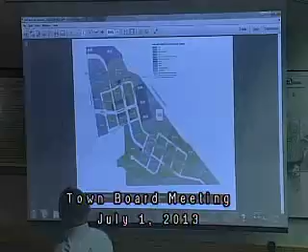You recognize the property, hopefully, but the dimensions have been elongated somehow in the transfer. The core area hasn't changed very much at all, and again, the focus on this plan was to revise the south area plan. There were a couple of comments that required a revision and to get specific feedback. The first guidance was to really make sure that the Coal Creek connection was a strong connection, not just an easement that the road might or might not go somewhere.

And when that road was identified as a priority road and a priority connection that was very, very likely, as I discussed at the last hearing, were that the case, we would change the grading and bring this road into the southern village green. And there's a couple of components there.

There's the bike path and trail component, and then there's the pedestrian promenade, and of course the third, and I probably put them in reverse order, is traffic, the traffic that comes into the town square.

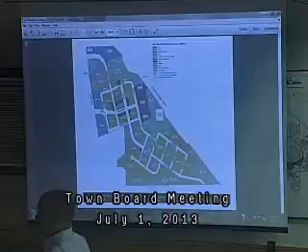So that we have that. Then we previously identified we were suggesting a feature on the edge of the village green, this pre-K site, the 2-acre site for BVSD. And here we've accomplished virtually the same thing. We really like the connectivity to the village green.

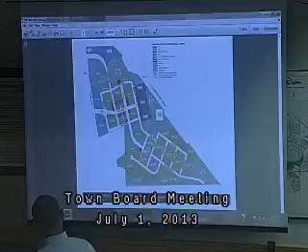And then we have all the other features we've discussed with the orientation, the pedestrian orientation of all the housing or live-work or whatever. All the structures built along Avenue B will recognize Avenue B as a strong pedestrian promenade and have that strong orientation, including balconies and accessibility. Sort of as if you were walking down Main Street in Louisville, you see the buildings, some of them old houses that were turned into stores and restaurants and things like that. So that's sort of how we envision that.

Randy, can I ask you a question? So if you do that layout, then you're not going to have any exit point through by Discovery Park, correct? Discovery Park, well, the office building up here.

Right here we would have a trail connection, so from here to here is 40 feet in height, in elevation. So we would have a trail connection to that existing dead-end road there. There could be an emergency access, for any time other than when there's ice on the road, it would work fine.

So part of what we've done, as I was mentioning, is in the previous plan we had a 4.5% grade going up there. We had 5% grade coming up Avenue B, so that was quite a steep grade. As I discussed before, but just to touch on it now that we have an exhibit to show, when this Avenue B was coming up at 5%, everything was impacted because we were trying to make this connection that's way up in the air.

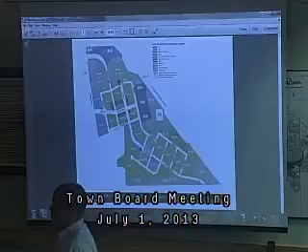And so now we have brought this down to a 3% grade, which is quite a bit lower. My goal when we get into final design would be to get us to a 2.5% grade if we can. That's really, really strong for pedestrian feel. San Leo Hills is 4%, and your staff has walked through San Leo Hills. In my lessons learned, I think that's a little too much.

It pushes the entries back, and it's a little bit of work pushing strollers up. Do it once, it's fine, but if you do it every day, it's suboptimal, and we want people to walk this every day. So our goal is to get that down to 2.5% grade, half the grade that it was at 5%. And we can achieve that by disconnecting these two roads.

So Randy, you're bringing Coal Creek up basically through the center and then connecting it with the pedestrian area. If we anticipate that Coal Creek being a feeder from Rock Creek is going to have more traffic rather than less, bringing the people who live in Rock Creek will use it to come up. Is there any merit to actually having it connect with Avenue C and coming around? Because you're going to have a commercial entity there on Avenue C, and another commercial entity further north on Avenue C, so keeping that heavier traffic out of the residential areas.

So our evaluation of that is traffic is a challenge, but it's also an opportunity when you're trying to create a vibrant commercial hub. Because we do expect traffic here, our traffic consultant has evaluated this plan and rerun calculations and told us that the main thing we have to do is give up on the idea that one day, under some odd set of circumstances, there might be 1,900 residential units. So if we take our application down to 1,400 units, which is the maximum we really think is reasonable given the office and retail, and now that we have the agreement with BVI and Cornerstone, that reduces the conceptual potential peak traffic.

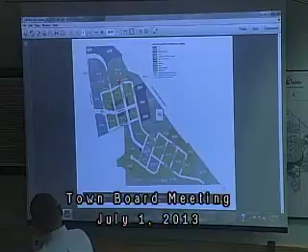So even though we have the wide street, we don't have on-street parking protecting the pedestrians. We have a wide pathway, 12-foot pathway, and we might have to introduce the loathed speed bump or something like that. The segment from here to here, I'm most concerned about the speed because there's no conflict.

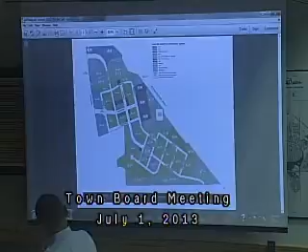Hopefully there's enough bike riders that will slow the cars down. When you hit the Village Green there, and you've got the 2 skinny roads on either side, are those one way? Yes. The traffic coming north on Coal Creek will always go to the right, and the traffic coming south will always go to the left. That's right, sort of if you were going west on Pearl Street. Right, and as right when you hit it.

So this may be a question more for staff, but the long-term vision of Coal Creek as it goes south out of the town center would be that there would be traffic mitigation through that area. It's a very wide street, we restriped it so it wasn't 2 lanes in both directions, so that was helpful, but I think there's been discussion that there would be hardscape changes there that would help mitigate traffic as well.

Staff's vision for the existing South Coal Creek Drive is to put a permanent landscape median in there and make it with separated drive aisles. And the timing of that would correspond to what was happening in the town center? We do those at the same time, we made a connection.

Okay, thanks. And then addressing another planning challenge that was addressed, and making sure that previously we had a narrower strip of office, and the concern was expressed that because of that narrow strip, the buildings might be intended to be aligned parallel to the 36, and there was guidance not to allow those office buildings to be a shield or a barrier visually. We want to provide peeks into the community to let people know there's something interesting going on here, so they come over here.

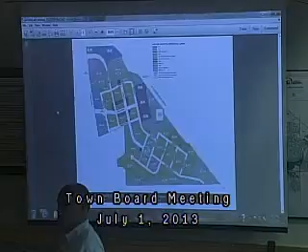I see Alex in the room, right? Is he still here? There, Alex. Can anybody provide me a corollary street that exists in the town of Superior or Louisville that would resemble the width of Coal Creek Drive as planned here, with the same level of on-street parking? I've got to go drive it, and I've got to see what I think about it.

Yeah, he's got some visuals. Great, but do you have something I can actually drive on? He does, he has real-life examples for you. Okay, good.

Well, while he's looking that up, what was the long-term plan for Discovery Drive? I mean, wasn't it intended to go all the way through at some point? And how did we deal with that grade in those long-term plans?

Well, it was always envisioned to connect, but the details for that connection were never looked at in that sort of detail. Not until the development comes forward would we look at it at that level of detail.

I don't know if this was where Chris was going, but I actually find losing that connection to McCaslin too bad, actually. Yeah, that's exactly where I was going. I like the idea of having that second exit there. I couldn't imagine residents wanting to take the back way through Coal Creek to come around McCaslin and get on the highway, but if everybody has to go through the town center and go on those sharp curves with stop signs, when people are going to work in the morning, is that going to create backup traffic in the town center? I guess that's maybe a question for Alex to address.

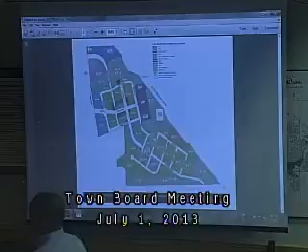This area here, there's a couple hundred homes within a 15-minute walk of downtown. So that 15-minute walk, it's a national statistic. I think in Boulder, my guess is it's at a 20-minute walk, 25-minute walk, people would still walk more.

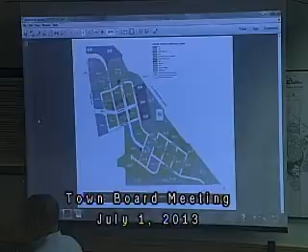Okay, so I do agree that there'll be a lot of walkers. There'll also be, for every person that walks, there's 5 that'll drive. Even from within the residential right here, they will get in their car and drive to here. Yes. Okay.

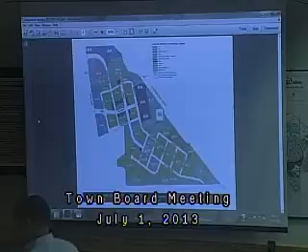They're going to shop big. They're going to shop really big. That interaction and that dynamic changes.

When you fill up your on-street parking, and then people know, you want to fill up the on-street parking, but at the same time you're filling up the on-street parking, there's more going on there, and then people will go out of their way and they'll walk farther.

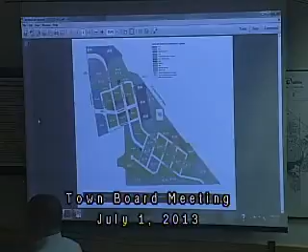When times of day when there's not a lot of activity, or when the on-street parking is convenient and right in front, people will drive there. They'll be more inclined to drive there. And then once people know that it's active and there's things going on, they'll be more inclined to walk.

And that helps the business not just be successful Friday and Saturday night, but 7 days a week. Okay.

Trustee Williams? Okay, I have a lot of new toys here, so I'm not quite used to operating them. So,

What I wanted to know here is the extension to Coal Creek Drive you've done. This is new. And how about, have you considered Campus Drive to Avista Hospital, as far as bringing those folks to Avista Hospital and vice versa, Louisville, Avista, so that your town center here, or our town center here, is more activated,

in what, Mayor, you're looking for? I want you to answer, but Matt, do you have any updates about anything?

Yeah, so that was one of the comments we received from the city of Louisville, and we're hoping that on the July 8th meeting during the work session that we'll have something that we can put together for you to look at to try to get a good feel of what it might look like or feel like with the plan.

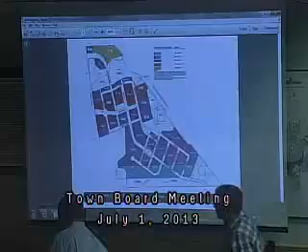Alex Ariniello, Director of Public Works and Utilities, responding to Trustee Pennington's concern about visuals and what these streets are going to look like, and some examples.

What I tried to do is, you're going to look at street sections as one of your sheets in the PD. I'm going to go over several of these, give you some visuals, and try to translate widths into pictures and feel.

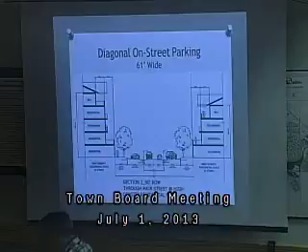Let me start with road design. A typical car is about 6 feet wide, a pickup or extended cab pickup maybe 7 feet wide, and a truck is about 8 feet wide. A typical lane on a freeway is 12 feet wide, so a car traveling down there has 3 feet on each side, and you design that for 65 miles an hour.

When you get into lower design speeds, like with McCaslin, we want to narrow the lane widths, going down to 11 feet at about 40 miles an hour. In an urban area, you can even go down to 10-foot lanes, because you're going slower and don't need as much room on the outside.

However, you have to think about trucks. Big tractor trailers are about 8 feet wide, so they have a little difficulty with 10-foot lanes, but if they move slow enough, they can do it. Your parking lane is usually about 7 feet wide. I wanted to give you those dimensions.

One of the sections discussed was having diagonal parking on both sides with 2 travel lanes, 10.5-foot lanes in this particular section. This is section 2, a 90-foot right-of-way with buildings coming up to the right-of-way line. So it's 90 feet between the buildings, with diagonal parking, and then a pedestrian strip of 12 to 14 feet that could be paved or have planters. That's kind of the diagonal design.

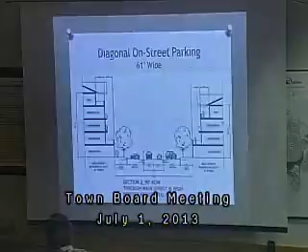And what are we proposing? 61 feet wide, compared to their 54. That's 61 from the curb, and 90 feet would be the right-of-way when you account for the sidewalk and parkway strip. So this is a little wide, and we've been discussing the width of the diagonal parking. Some have a pan here, so instead of water flowing to the curb and gutter on the outside, they're collecting drainage in this 2-foot pan between the diagonal parking and the travel lanes, which is why it got a little wider. I'll show you an example of that in a minute.

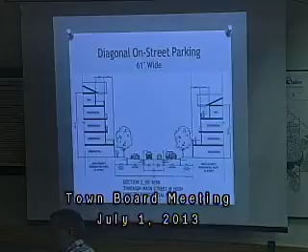And it feels dead and no one ever crosses. Right, and when do these get too wide? This is, I mean, this is too wide, almost. One feels it's too wide, you know. I would agree, I remember Carl thinks that's his talking point.

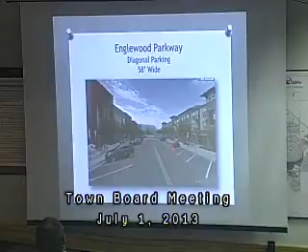This is one in Englewood, and here we have 58-foot wide diagonal parking with 3 or 4 story buildings.

Okay, so the next section I want to look at is the parallel parking on both sides, and this is section 4, one of the loop streets in the core area. We have parallel parking on each side, a 12-foot sidewalk, parkway strip, and parallel parking.

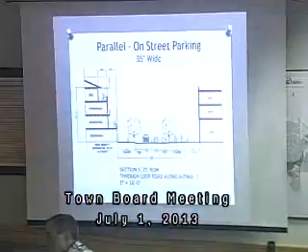And this is section 5, where you widen out in certain areas to allow a wider area for the building and for cafe parking, cafe seating, and so on. So go back to this - how wide is the driving? This is 35 feet wide, so you have 10.5-foot lanes and 7-foot parking lanes.

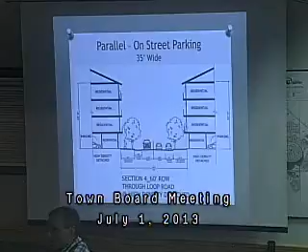And are we going to allow semi-traffic through Town Square? Is it going to be allowed up Coal Creek Drive? We'll have to allow delivery trucks since we have restaurants. So how do we intend to funnel delivery traffic? Is it going to go wherever it wishes to go? What we do is take our design vehicle, a big tractor trailer, and circulate it through the core area to make sure trucks can make the turns.

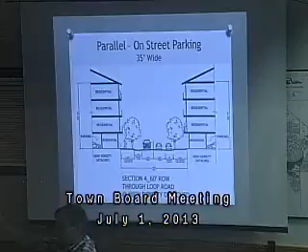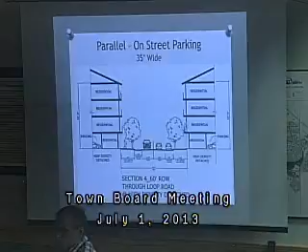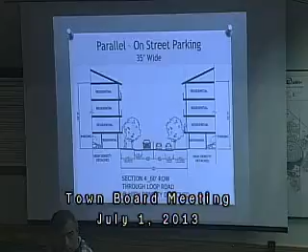We make sure in areas where they have difficult turns that they have ways to traverse the curb - we don't want them traversing the curb. We looked at all those areas to make sure they can make the turns. It's typical that when they make a turn, they take up the opposite travel lane in this type of urban environment. If you accommodate those types of trucks for pedestrians, you get wide intersections, wide streets, and it's not as pedestrian friendly. So there's a trade-off between a pedestrian friendly street and a street that has commercial traffic. We don't intend to have a lot of those types of trucks going through, but we can accommodate them.

Those are 12-foot roads then, right? Because you've got 7 and 7 is 14, 38, 24 - they're 12-foot lanes for this. These are probably 11-foot lanes and 7-foot parking stalls, so 22 plus 14 is 36, 38. Can we see any of those with cars coming at us? Yeah, I'll show you a few empty streets.

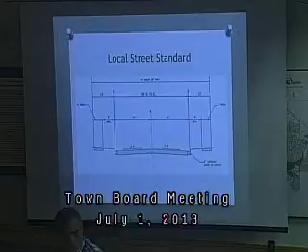Now, to me, 30 feet, again, that's Sagamore, and you've got to be careful how you design it. If it's a collector, we had that debate early on about whether Coal Creek was going to be a collector through the town center. If it was, we may want bike lanes. So we had that discussion. Initially it wasn't going through there, it wasn't going to be a collector, but now it looks like more of a collector.

Castle Peak is another problem street where you actually have a lot of parallel parking on both sides. You've got a lot of small children, a dense neighborhood, but nowhere as compacted as this is going to be. How wide gutter to gutter is Castle Peak? They're a little wider, 32 or 36 feet. Which one? We have some 32-foot streets, I think.

I'd be interested for future reference because to me, Sagamore does not work, and Castle Peak does not work, if we're designing something from scratch where we've learned lessons. A lot of those streets have very narrow walks, 4-foot walks that are sloped. You don't really want to ride your bike there, and it's not wide enough for two people to walk. So we're going to have separated detached walks in most of the area, so we'll have a better pedestrian environment.

And how wide are the sidewalks? Five feet wide. So I just wanted to give you a feel of the streets around the area, what they look like, and what their feel is as you go through the cross sections.

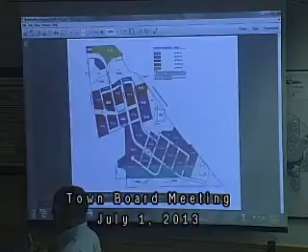You might have some neat feature in a building, like a parapet or a rooftop feature, whether it's a usable architectural feature or just an architectural feature in the concept of community art or village art, maybe a clock tower or some other feature. So what we're proposing is to focus just on building heights by these districts.

So this would be the 55, everything in purple, and then 65 feet would be the buildings in red, and in orange would just be the 75 feet. So there's just right on the town square.

We had talked about taking the town square down to 55 feet, but the thought is that we need a portion of the town square. We want to distinguish it as a town square, so for just a small piece of the town square right here, we would want that to go up to 65 feet for that small area.

65 or 75? I can't see the numbers up there, I apologize. So the orange is 75? Yeah, thank you. So as opposed to the approved PD, where everything was 75 feet and 5 stories, the only things that would be 75 feet in the town center are these 3 areas.

This over here is the Cornerstone Medical Office Building, and before this came up, we've had discussions, and they're working on bringing in other medical office users and putting together their magic formula of tenants. So we've contemplated that at 5 stories.

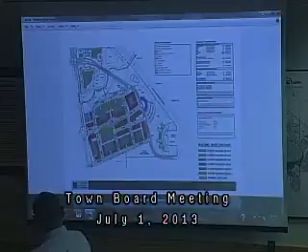And again, that would contrast to the approved PD, where the colors are the same, but everything in this orange color is 5 stories, and everything in the other orange color is 6 stories. So there were just these 3 buildings that were 4 stories, and so we sort of turned that around.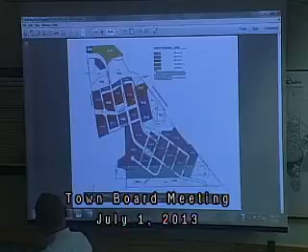Instead of having 3 buildings that are 4 stories and all the rest 5 and 6 stories, we would propose to have 3 buildings up to 75 feet, and most of the buildings would be in that 65-foot category, which would be the 4-story category. And then, of course, you have a lot in the 3-story category. Going back, there was nothing in the 3-story category before — it was all 5 and 6 stories.

So if you might - staff will have this, you can go back and forth between these exhibits. So can I break in, and I know that Trustee Williams has...

This is obviously different than what we talked about 2 meetings ago when you said it'd be 2 and 3 stories with some buildings up to 4. Given that there's some height distinction, it would be 32 or 55, with some up to 65. This is different from what we talked about 2 meetings ago.

Well, it seemed to be some, this doesn't seem to jive with what I heard at that meeting, and so we want to reconcile that, and that's why we went to absolute heights. One thing we were focusing on is the actual livable space, but we have 1 story of parking. So we think of 2 and 3 stories with tuck-under parking, but when you get to the building code, that's another story.

So those are really 3 and 4-story buildings. We've identified here that's again where we're going to just maximum height. So whether you call it a 2-story building or a 3-story building, we have these height districts. Again, that's the focus, so that we're all talking the same language. We can measure the height based on the town code of how you measure height, and the height's the height.

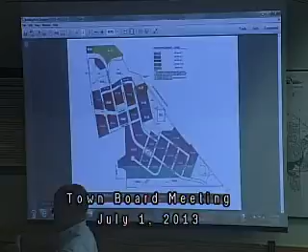So this is our approach to how we can have the flexibility to provide the variation, and then we have a footnote in there that, subject to the approval of the town board, up to 25% of the space could come in at up to 75 feet.

We might have a special user that comes in, and in the same context of allowing for 500 hotel rooms, we wouldn't want much of the space to go to that 75 feet, which is your current PD, where everything's 5 and 6 stories and up to 75 feet. But what we're saying is we'd limit it to 25%.

If you want to change that number, by the way, this is to get your response to that. Maybe that number is 15%. But it seems like there ought to be some percentage that's 75 feet, so that everything else can trickle down from there, and you can have a bit of a variation.

You saw some of the imagery in Boulder and other places where you have these 5-story, and then others. So wondering what an example is of a 75-foot building.

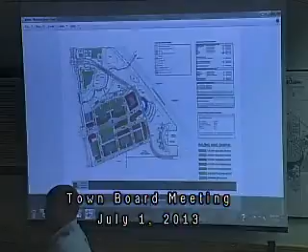Is there an approved example, the original PD had? I'm just asking about 75, when it already exists, just so I can get a sense - what is the Renaissance, for example? How many feet tall is it? It's 4 stories, I don't know - oh, the Renaissance? I don't know, that's like 10 stories, I don't know. Okay, sorry, just trying to get a sense.

Well, I'll leave it for the moment, but the imagery that I saw, that all those are - I mean, there's a few - I believe this building is 75 feet.

Right, so that one presumably is 75 feet, but most of the imagery is 2 and 3 stories - even the imagery that you provided us, and in the packet, some percentage, maybe 15%, would be up to 75 feet, and the rest is that transition, 65, 55. That'd be really helpful guidance.

But we think if it was all, for example, 3 stories and 45 feet, it would still get a monotonous, tall sense. That's why we want to break it up. I enjoyed the 2 to 4, that sort of broke it up, but just for right now.

Trustee Williams? So you're envisioning this all to be residential? No, not this part? The corridor? Along that - which one are you? I'm sorry, where are we on the map here?

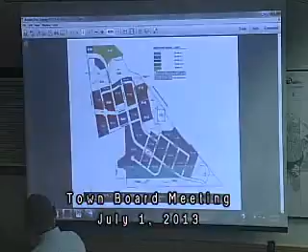So looking at the red, this here in the town core, Main Street is all flex space.

The 5 blocks that comprise the town square, the ground floor is commercial. Because I'm looking at this other one that's showing it all to be residential in the red, which is the yellow over here. So in the land use concept...

The whole zoning in the town square is PD zoning, right? And so this is the advice we've received from our consultants: 80,000 feet of specialty retail, local retail, restaurants and entertainment, boutique shops, that would be a good amount of space to be able to tenant and occupy.

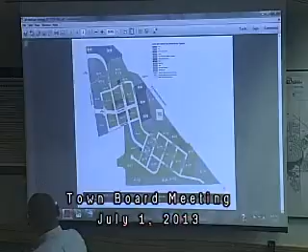When that's occupied, some people think the retail market might become more vibrant than others. Any place in here, if we get a great tenant that we think adds to the town center, we want to bring them in, we'll propose them, and we might process an FDP for that specific site. So everything is flex. Our best estimate of where the market is, our best estimate of what we can achieve is, and this is our commitment of this 80,000 feet, that's commercial.

All right, so I want to know about - I understand the flex to be that the owner has the right to switch it to their liking, is that correct? So whoever's the owner of that particular storefront can choose to change it over to residential, is that correct?

Outside of the town square? Not for these 5 buildings, and not for these buildings here. The red squares, that's ground floor retail, and the red and candy cane stripe is ground floor commercial, so that could be office or restaurant. And that's 80,000 square feet of retail on the bottom, correct? Commercial, yes. Commercial.

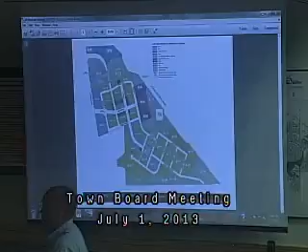And one thing that's not reflected in here, that I probably should have put in, is that staff had requested and the Planning Commission had requested that the frontage along the front 300 feet along McCaslin be reserved for office in perpetuity. And so we have agreed to reserve that front space for office.

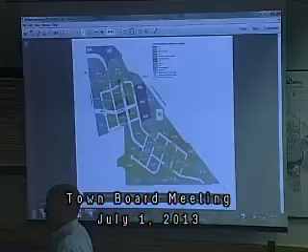This space over here is solely zoned office. And then we've discussed how the red is purposely zoned residential. The rest is flex, though. Retail, I think you meant. Red is retail, not residential. Pardon me, red is retail, thank you for correcting me.

This is the best chance, as we get retail tenants on the town square, we're going to build out the town square here with these two buildings and then this building first. This is our best shot at getting a hotel, and we think if we get good restaurant tenants and start demonstrating the vibrancy we think we're going to have here, we could have a good shot at getting a boutique hotel right there on Main Street in that location.

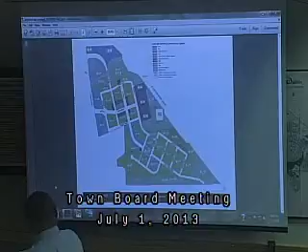So on the land use plan, that is zoned. This is just a concept. We don't want to promise something that we think is completely unrealistic. Our concept shows that this portion of the block is residential.

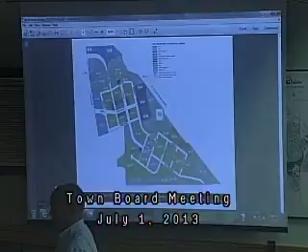We would, if there's a viable potential commercial use, that value -- and I'm only talking value in the context that I think it's important to understand that our interests are aligned. We're a commercial enterprise, we're a business, we want to make as much money as possible, we want the project to be successful, we have to balance all those things. If there's a chance we're going to bring in that commercial user, a hotel user, the value they attribute to the land is much, much higher than a homeowner.

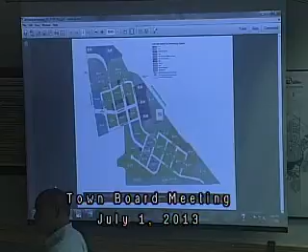So, yes, I do think that boutique hotel, if it goes in -- and I noticed you haven't shown it on this map along that L there -- the situation of that boutique hotel there, I hope it works out, because I think it's smart. I think that would be a great place to try to attract a boutique hotel. Especially if it has a boutique restaurant, too, and a boutique gift shop right there in the front, some nice things like that.

I do believe the success of all this will depend on varying heights, et cetera. I think it makes it visually interesting. Having said that, all your red, you've got a huge core of red, all the same heights here. I'm assuming they're going to be inset and articulated and all that kind of stuff to create interest, but it does seem to me like a little much on all the red there. And then down here, this is all the same height down here.

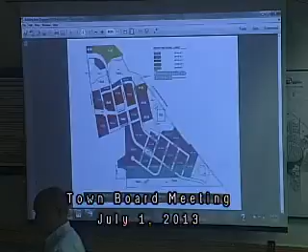Well, again, those are the same maximum heights. Right, not the same heights. As long as we're clear and in agreement that, in fact, we expect articulation, we expect interesting variation in heights, then... We're in agreement. Okay. Now, I know the Planning Commission said office in perpetuity here, but if, in fact, the board has never heard why, and the board has never weighed in on that, I'd be interested in what the logic behind making that in perpetuity is.

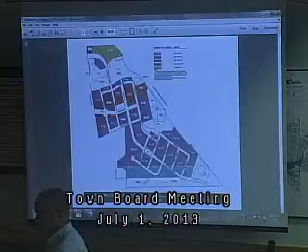So far you've convinced me that current economic times require flexibility, so why are we taking that very important entrance and in perpetuity saying anything about it? Is it office or is it retail? It's identified as flex. So it could be office or retail, my recollection is it's just not necessarily residential.

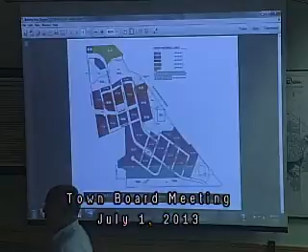Actually, I think that's right. I have to go back and look at my notes. I think it was office. That's what I heard, but I don't think that's what it was. I apologize, there was a point in time when that was the discussion.

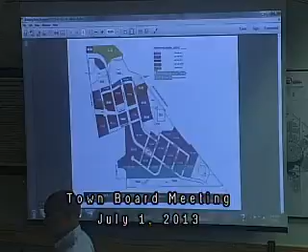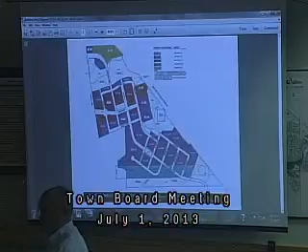So if it's retail or office, the entrances to the buildings are off McCaslin? How will that work off McCaslin? Well, McCaslin will be a face, but not an entrance. So the buildings will pay attention to it, but they won't turn their back to McCaslin.

They would recognize McCaslin as a dominant, high-traffic corridor where image is really important. It helps establish the identity for the entire town center for people driving along McCaslin. But for entrance and access, we'd want people to park in the town center and be part of the town center environment. There would be no drive access from McCaslin.

Well, this is the first time I've heard the word retail applied to any of that frontage along McCaslin. So I'm interested in hearing what the logic of the Planning Commission was, or what the conversation was. You mean commercial? I would like to know the background of the conversation about what should face McCaslin, because I feel in the dark about it.

That discussion came after public comment was closed, so it was a discussion among the Planning Commission, and it was one of staff's recommendations as well. I just couldn't understand the logic. That it wasn't residential, right, that's the bottom line, just not residential.

Right. I see Clint here, if he wants to come up and explain that. Well, let's— can he explain that? It would be a little out of the ordinary, but we could certainly do it. I don't understand what's happening there along McCaslin.

I think the desire is that it's a high-value commercial space and they don't want to put a lot of residential next to McCaslin. Why would you want commercial over residential users there? Visibility from the roadway. As you head north on McCaslin into Louisville, there's some residential you can see further north, but in that commercial area, it's all commercial right on the road there.

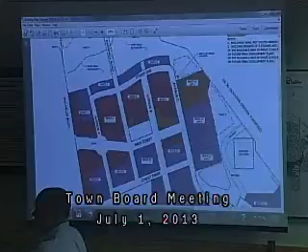So do you have a way we could introduce that into the architectural guidelines, into Chapter 8, so that we have building articulation?

Sure, trustees' comments. And if there's a way to say also that it can't be that height right at the street, at the front of the street, that would be great too. That it graduates.

I'm flexible, and I could give you 5 stories on a quarter of the block on the plaza if you absolutely felt like you had to. I'd like to use the pointer again, but I won't be able to get... this one here? Yeah, thank you.

And the other orange to the east, that little L-shaped orange -- Block 7, yeah, that's right -- if it were to become a hotel, then it could go up to 5 stories, and if it weren't going to be a hotel, then it would have to be a maximum of 4 stories.

So I think that's all I had about that. Does that sound like a reasonable approach to you? Yes. Okay, Mayor, can I have one comment?

Yes, you were talking about the guidelines versus the PUD actual restrictions, so we're talking about putting varying heights in the guidelines. Right now, my understanding is those are guidelines, so it wouldn't necessarily require that the buildings not all be 65 feet. If you want an actual variance requirement, it needs to go into the PUD itself.

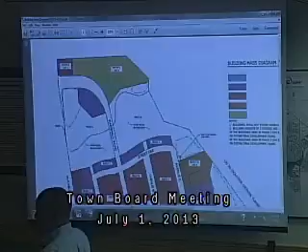There's important view corridors in there that look towards the Flatirons that make this property very valuable, and we don't want to prevent motorists as they go by from seeing that there's something interesting going on there, and how lovely it is to the west. I bet if I went there and bought something, I could see something. We don't want that to be a barrier to that concept.

So I'll provide some imagery on that. In the interim, we're focusing on the hotel envelope being right in here, and that would be my guess of what you do, that you move it a little bit away, and the orientation of the hotel would be maybe diagonal or whatever.

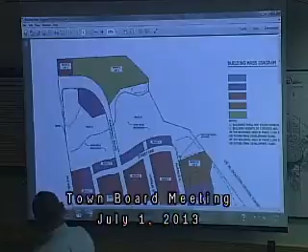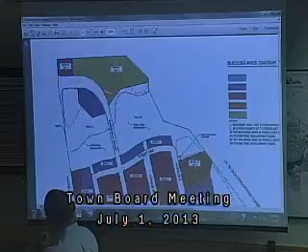Our hope is for the massing to appear on Marshall Road. As you enter, Marshall Road becomes an important road with an important building. When you're sitting here at the intersection, we want you to look ahead and say, wow, what's going on over here? And so that, by necessity, pulls it away from the 36, and there's also higher noise levels right on the 36.

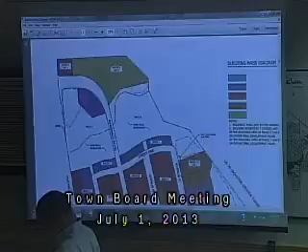And then you provided, I think—is this from tonight, or was this in my packet? Can I ask any remaining questions about that?

Of course. I actually like your point, Andrew, about not creating a 90-foot barricade wall. I can see that hotel of varying heights that actually allow see-throughs. I assume that that's what you'd do, that you'd have a step.

In the central core, where you said only make that hotel 5 stories, should it be a hotel, I actually am looking for the height in the center of the core around the square to actually be visually higher. I'm looking for that to be the highest point in the whole town center. I thought we had talked about that, Randy, that the highest point of the town center core would be around the square, so as to draw your attention to the central point of that core.

So if you move that diagram up there, move it upward so we can see the square. If in fact, yeah, just a little bit more, yeah.

There you go. If we lose the hotel at the 75-foot max height, let's say that doesn't come in and so we have to drop it down to the red color, in fact we've lost the visual height there of making that the tallest part, except for your little square there on the town square. No, because most of it will be 2 and 3 stories with some four-story buildings.

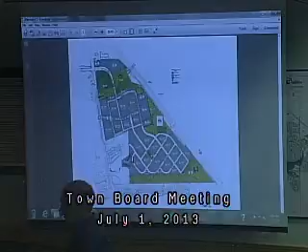Okay, so next time this comes around, maybe at that next meeting, can you just show that? Because once again, if we have fields, we want to be able to plan on them, and we understand that during extraordinary circumstances they're not going to be playable, but we want them playable and not underwater 99 cases out of 100.

What we could do is an approximate study, a full detailed study like that is a month's worth of work, but we could do an approximate one. I would give you the liberty of just sketching it out to the best of your approximation.

So why is Town Hall not on here? In terms of this being dedicated town space, right? Well, just the fields, parks and open space. So just point to the other town properties.

It's easier to see on this one. The legend is really hard to read at this scale, so I'll just read it to you: the green, evergreen, is developed parkland, and the yellowish green is naturalized landscape / open space. So we didn't put the other parcels on there, the town hall parcel.

So is now the time to ask, if I have a question about that Marshall Bridge? Yeah, that would be reasonable. So what does, how's that going to look?

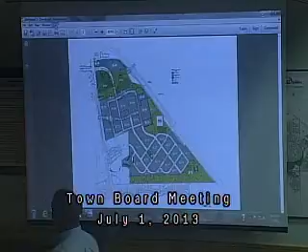My concern is, does it split the Coal Creek corridor in half visually, or is it going to be elevated enough that visually the Coal Creek corridor stays intact and is usable as one element, as it is today? Well, the Coal Creek pathway would pass, there'd be plenty of room to pass underneath the Marshall Bridge, so I would say it would stay intact beyond what you use today.

Do we have an idea how wide the opening would be here? Jim? That would probably be about 100 feet, is what the waterway opening needs to be, between 80 and 100 feet, whether it's a bridge or a combination of culverts. Does that include the width of Coal Creek? That would, yes. So what is the width of that over land?

Well, Coal Creek itself, as you know, you can step across it in a lot of seasons. So it's kind of the lowest point in the floodplain where that would be. We haven't designed that structure, but what this plan contemplates is potentially a separate structure for the Coal Creek Trail, because the trail is so much higher, we wouldn't want the whole structure to have to be that tall. We want to start coming down as soon as we go over the Coal Creek path.

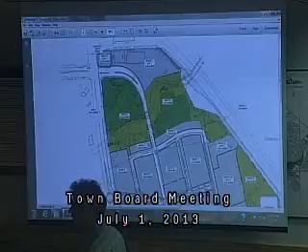The tree line, as it stands today, is basically left intact. The intent would be, the recommendations from the previous environmental plans would be that there would be an ongoing restoration of that corridor to improve the habitat and get rid of invasive species like crack willows and things like that. That's my understanding of the intent at this point in time.

So is it 30 feet, 50 feet? How much on each side are we talking? In many cases it varies with the use that's adjacent to it. Where we have the multi-purpose field, it comes up very close to the edge. This is an area where it's more naturalized. It's still developed parkland, but it once again would stop at the tree line.

So it varies from location to location. It's not continuous. Again, if that would be a requirement, I guess we'd have to look at that as an idea. I know we've looked at this before. We looked at 30 feet, we looked at 50 feet from the embankment or from the center of the creek, and I'm just curious as to where you guys are going with that.

Well, the tree line, the tree canopy, extends far beyond the banks of the creek. We stayed well out of that. If you can see this serrated line here, that represents the tree canopy, and the creek corridor, as you can see, is a considerable distance from the edges of that. As a matter of fact, this double line through here is the creek, and let's see if I can find something to scale—it's at least a couple hundred feet away. Okay.

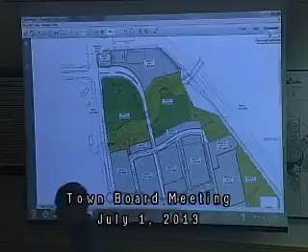But I thought you said 100 feet, what was that about? That 100 feet is the span from end to end as you drive across the structure. No, I was asking about underneath the road, how much walking space and how contiguous the creek will be under the bridge. From a flood standpoint, this structure doesn't need to be very tall, maybe 6 or 8 feet high unless deliberately made higher. So my question is, are we functionally splitting Coal Creek into two halves?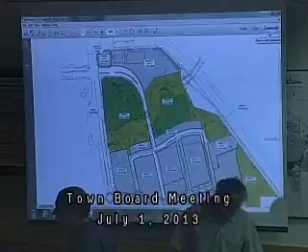If I'm on the west half, say I came up Avenue A and walked along the edge of the natural area, can I meander over to the playing fields on the east edge, or will that be cut off by the Marshall bisect? The way this is currently drawn, you'd have to cross on the bridge here to get to that side, and visually it would be cut off too.

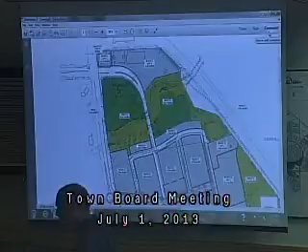So it is going to be two halves, is what I'm now interpreting you as saying. The way this is currently drawn, it would be. We could make this bridge high enough to walk under, but that means raising the entire road and making the dike higher—every foot you bring it up makes it 6 or 8 feet wider at the bottom. So it's a trade-off.

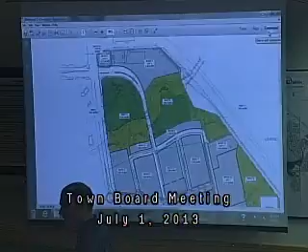This goes back to the debate: some like this bisect, others suggest Marshall should be on the east edge instead. I just want to make sure we fully understand that if we accept this bisect through the middle, we're basically cutting the Coal Creek corridor into two parts. That's very important to me. My point was that it's worth it to me to have the bridge be higher so we can walk under it and be one with the creek.

At the last meeting there was some discussion about presenting building precedents—was that coming tonight or at a different meeting? We can have that ready by Monday; we've been working on it but don't have it ready for tonight.

I don't think I have anything else. Other questions from the board? Were we going to make our way through the rest of this? We stopped at Appendix B, so there's just two pages left, mostly maps, and a lot of this is going to be altered. If people have other thoughts we could just go through the pages. We went through landscaping, architectural color palette, architectural materials, and streetscape materials last time, right?

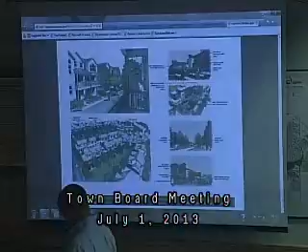So I don't have anything on this. And in terms of the big PD map, I think we've addressed everything in there essentially, someplace else, so I didn't have anything. So, Matt, did you have anything in particular?

Can I ask a question while Fred's gathering his thoughts? The Coal Creek connection that Randy drew on there, I want to throw this open to Matt or whoever can answer it. Does that all presume going over Anderson? Yes. Okay. There's no other way to make it. Yes, it does.

Are you able to speak to whether or not you have a good working relationship with the Anderson property? I haven't talked with the Anderson property owners. So we don't know. Town staff, do you speak to them? Yes, we speak to them a couple times a month. And are we hopeful? Yeah, because they're interested in developing their property or selling it. We've had discussions on different prices over the years, and I'd have to reach out to them again to see what their latest price is.

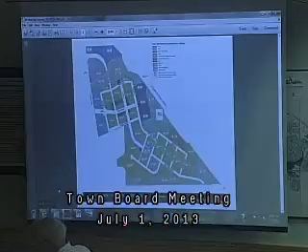The other one that we talked about were these areas - these areas along in here, here, here, and here. Now that, we think there's probably something for the developer to think about extending this, the retail.

There's flex space - the darker areas are where the retail is, but they also create a flex area in here that the retail can be expanded. That gets to what Trustee Williams was talking about in terms of offering more opportunity for retail expansion. In other words, there's a real intent to create retail along Main Street to the maximum extent possible. So these areas along here, here, here, and there.

Okay. What is that designated now? Well, it's designated as - and unfortunately the map I have is basically residential. It's the lighter gray.

So we were talking about the northern half of these blocks and these up here to be flex space, not residential. Although it could have some residential in it, it just gives you more opportunity. And then here, we're looking at having the indication that it also includes retail or flex space. So that gives a little bit more growth to the retail area, at least in terms of diagram form and intent. I agree. Long-term, the vision would be that Main Street would be a commercial, retail street.

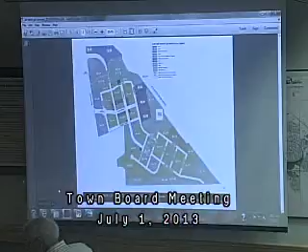So your recommendation is to be retail and not flex space? No, what's indicated here is flex space. This red, this guy here is the one in the middle. It's retail with flex space above. That's what this is here.

We're suggesting that it be extended in these areas here - just to be extended to include flex space? Yes, yes, okay. Not exclusively retail, but flex space, so there's an option. I agree. That's right. This would be - staff recommendation? Or whose recommendation is this?

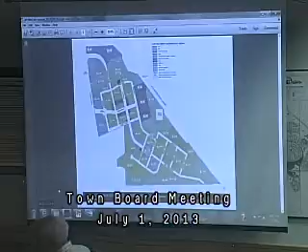So the color, just to be clear, would it be the crosshatch, which would be retail with flex above, or would it be blue, which would be flex space, office, residential, live-work? Well, the areas along here, here, and here would be retail with flex space above. And then we have flex space in these upper northern portions here. So my only thoughts - I totally agree with the concept.

The question is whether or not, when those buildings are built, they'd be viable for retail right off the bat. They may not. They may not, but the intent is there, and it depends on how we then look at that PUD, okay? And let's say we're doing this block here, or about half a block, or whatever.

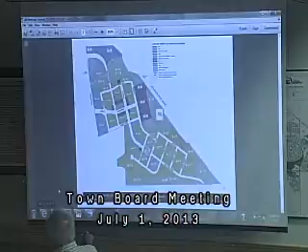Right now, the intent is definitely to have it along this street here, and also along here, but at that time, we would be looking at what the market demand is, and whether we try to really get the developer to put retail on that bottom floor when there's no market. But if there is, and this is one of the first blocks going, then maybe that's not such a bad idea. There's flexibility between doing that or not.

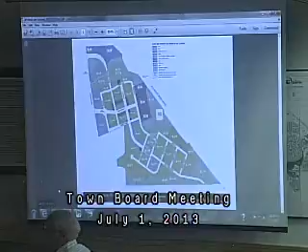Whether or not it works out right off the bat, who knows, but 20 years from now, the vision would be that at least the first floor would be commercial/retail along Main Street. It just gives you that opportunity to at least grow into it from what the intent is on this PD.

I just wanted to be clear on that. So your recommendation is that it could actually be residential at first, but if we found that we could expand retail, we would have that option at some point in the future? I'm not real keen on saying that has to be designated as commercial or retail. No, I'm not either. That's not what we're suggesting. There's flexibility between that.

But this one is showing a real intent, and the idea is to extend that here in the same way, because otherwise it's listed as residential only.

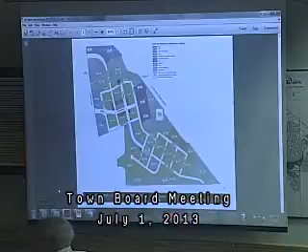That's what I have. We should just clarify exactly what, to me, when I read this - and tell me if I'm wrong - that retail with flex above means it's retail on the first floor. I'm hearing that we actually want to have flex on the first floor and flex above. That's what I'm saying.

It'll probably have to be modified somewhat, just to make sure we're on the same page. Yeah, so maybe there's a different designation.

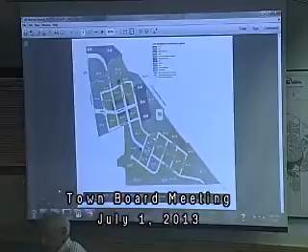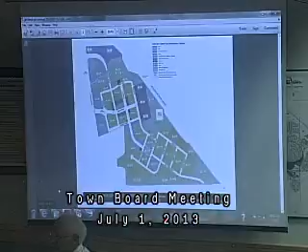I actually need the benefit of developers' practical experience. My intuition would be that once something is developed to residential, especially if it's purchased, if somebody owns that property and it's residential, is it practically ever going to be changed to retail later on? So my intuition is you actually have to commit to having retail there and commit to giving it a long enough window to materialize, and then have the flexibility as a board to change that if over some period of time it doesn't materialize.

Because in this market, in this location, it's going to be pretty easy selling residential. And once it sells, it's permanently developed to residential, and doesn't really have a likelihood of ever being repurposed. So my instinct is that you actually do make it the striped retail with flex space above, and some future board might have to change that if it doesn't materialize. But if you make it striped and say retail below, it has to be retail below.

Sure, and I think then there's a commitment as a developer and a town commitment to trying to make that retail. Once it goes to residential, I don't ever see it go into anything else, but it's privately owned - it's going to be permanently residential.

Randy said last week, I think I heard it this way, that they hope to be 65 to 75% committed in the core area, and if they get more commitment going out, then they would put retail and commercial in there. But right now it's saying it has to be residential. So why wouldn't we say it could be either residential or retail, giving him the flexibility that if there is more demand, he can put it in there? Because right now, the way it reads, he can't do that.